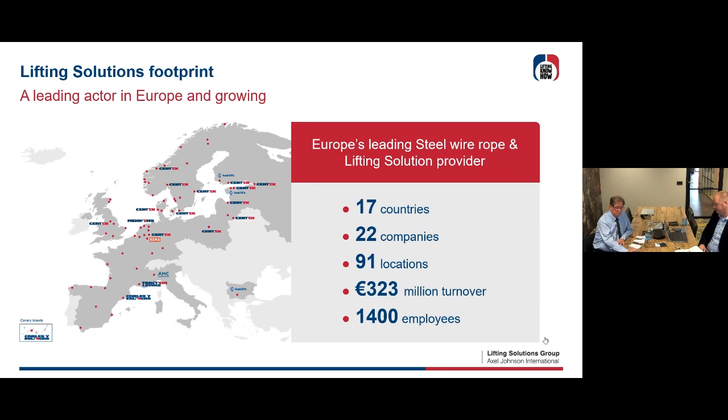Good morning, very warm welcome from my side. I'm Alain Bouwman. I'm from Belgium. I am an industrial engineer chemistry, and now I'm doing the last 36 years of steel wire ropes. So that is another story, we can talk about it later. I'm at Certex Belgium since 1986. They tell me I'm the senior wire rope specialist.

I give advice to people. We do a lot of investigations. We try to serve our customers with the best possible solutions for their wires, to have the best service life for their applications. We have our own special lab to do investigations from wires that are discarded or dismounted, and then to advise people.

Okay, welcome to the world of steel wire ropes. I have some remarks up front. Steel wire rope is a consumable. That means it has a certain lifetime, and then it will become a rope which is fatigued, which has wear, which has some wire breaks, and then you have to put it out of service. You have to replace it. It is really a spare part, let's say.

In 80 or 90% of the problems I have been solving, it is normally not a problem of the wire rope itself, but a problem of the installation, or of drums, or grooves of sheaves, or just a bad choice of wire rope for that kind of application.

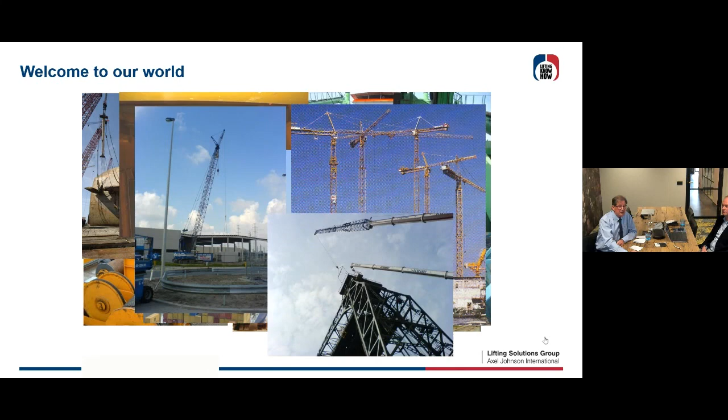To be honest, if you start with a good wire, you're going to end up with a good wire rope, if it is manufactured the good way with good machinery. But one thing for certain, if you start with a very bad wire, you're going to end up with a very bad rope also. That's why I started with these remarks.

You saw here in the picture some applications of wire rope. It can be a thin wire rope or a much bigger one, like we did for dredging companies. We have in Belgium rather good and big, world famous dredging companies, so we're doing a lot of advice there.

Applications of steel wire rope. I just added here some things you have to think about when using wire rope. Sometimes there are high temperatures involved, sometimes environmental issues with acids. You have to take care of corrosion in water applications or at sea. You need rope which can withstand high pressures. There will be rough treatments, high speeds and shocks, like on container applications and container cranes, with a lot of frequencies bending over drums and sheaves for maybe a million times.

To specify the best type of rope you need, you're going to do the calculation of how much strength you need. In certain applications, you have a safety factor to respect, depending on the application - overhead cranes or container cranes, elevators have a different safety factor.

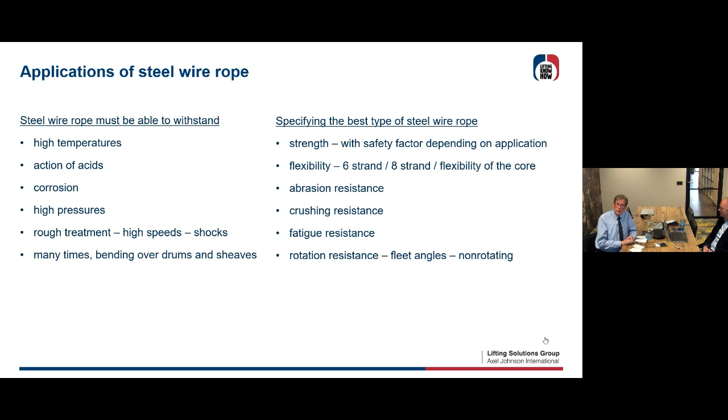Sometimes the rope has to be very flexible - you need 6-strand, 8-strand, flexible cores or not. You need to take into account abrasion resistance, crushing from ropes on multi-layer drums. You have to consider fatigue - any rope will get fatigue in the end. Some ropes have to be rotation resistant for high cranes, and you have to take care for fleet angles and non-rotating ropes.

They asked me to give you a basic webinar, a basic seminar for ropes today, so it's going to be basic. We're going to talk about tensile strengths, different constructions, rope lay left and right - I'm going to explain later - and practical applications. I'm going to give you a clue for the high performance ropes, which will come later in another different seminar.

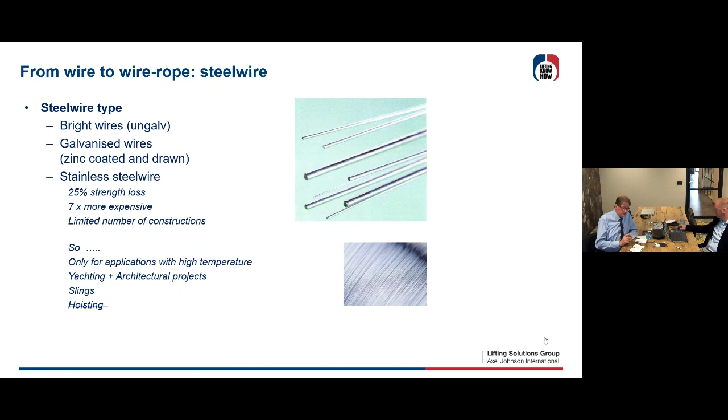For tensile strengths, I can tell you that from the factory you can have different kinds of tensile strengths, explained in Newton per square millimeter. There are nowadays 4 types of grades of different strengths in wires: 1560, 1770, 1960, and 2160 Newton per square millimeter. That means if you have a steel wire, you can produce it in all these different tensile strengths, so you end up in the same diameter with a rope which is stronger or much stronger. If you manufacture it in wires of 2160, you're going to have in the same diameter the most strong rope.

But price will go up, strength will go up, but take care, your hardness will go up too. And sometimes it is a disadvantage to have a very strong rope, but also a very hard rope, because it's going to wear out your sheaves or your drum.

So you're only going to need really 2160 if you really need the strength to have a rope which is so strong. All these wires have to conform to the regulations you're going to see in the ISO normation or European normation.

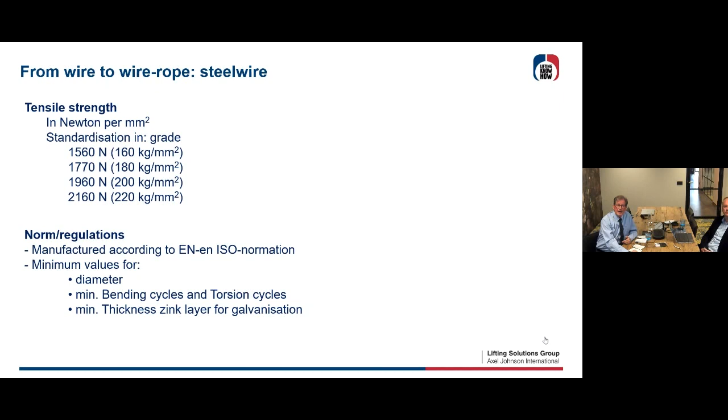So we don't care about that. It comes out of the factory, and then the factory will make a steel wire rope. Let's explain a little bit about how this whole process from wire comes to steel wire rope.

You see, everything starts at the steel mill. They produce in the rod mill, let's say, rods of round wire.

It's like the blacksmith, who's heating up, let's say, steel to get it stronger and to give it better properties. After the heat treatment, we go cleaning, and then we go to the initial drawing.

So then we're gonna put the wire to thinner and thinner and thinner diameters. And then if you need a galvanized wire, then you do the galvanization.

So you put a little layer of zinc on the wire, and then afterwards you're gonna do the final drawing. So with the zinc on it, you draw the wire to thinner wire and thinner wire till the diameter you really need.

In the 70s, till the 1970s, there was a difference between the quality and the strength and the properties of galvanized wire and bright wire.

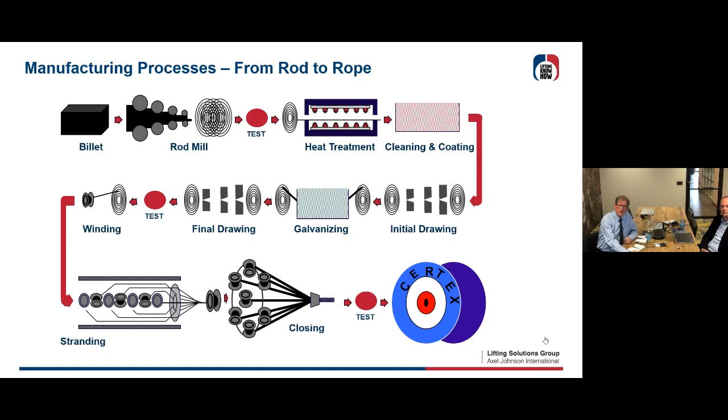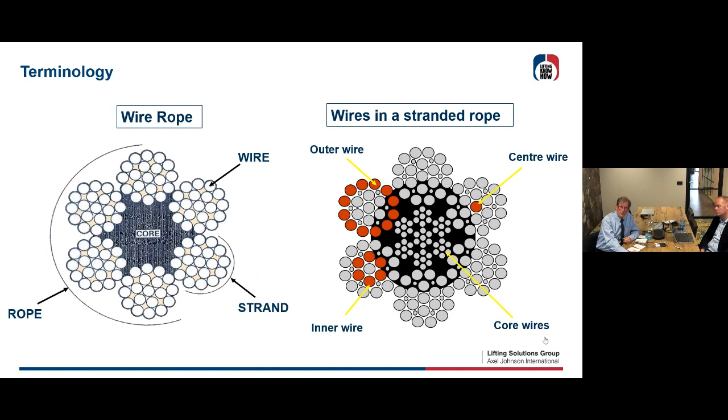So that is, let's say, the terminology about wires.

Okay, let's make wire rope. Wire rope is made in 2 steps. The first step is manufacturing of strands. So we do stranding from some wires to make a strand. And the second step is the closing of some strands to obtain a cable. We call this closing or cabling.

You see on the left there, the whole drawing. You see the center wire in the strand, and then you have the outer wires in the strand, and then

you see we have there some strands around the core, the closing. So in the end, we have the whole wire rope.

Look at the different types of cores you can have. You can have a fiber core, let's say that's cordage inside your 6 strands, or you can have an independent core, so an independent little wire rope in the middle.

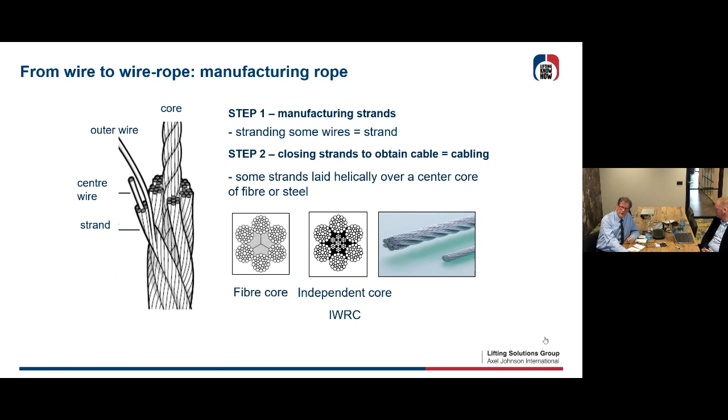Step 1 is manufacturing of the strands. Traditional, this is at the left side, the most simple strand you can make. You just take 1 wire and surround it with 6 wires. You can even try to make this kind of construction yourself with some coins. You can see you can surround it with only 6 and you have 7 wires, 1 plus 6, in 1 strand.

If in the same diameter you need a strand which is more flexible, you can start with thinner wire and add another layer, 1 plus 6 plus 12, ending up with 19 wires in 1 strand. If that isn't flexible enough, you add another layer, 1 plus 6 plus 12 plus 18, that's 37 wires in 1 strand, and you can add another layer to get 61. So more flexible every time you use smaller diameter wire and add more layers.

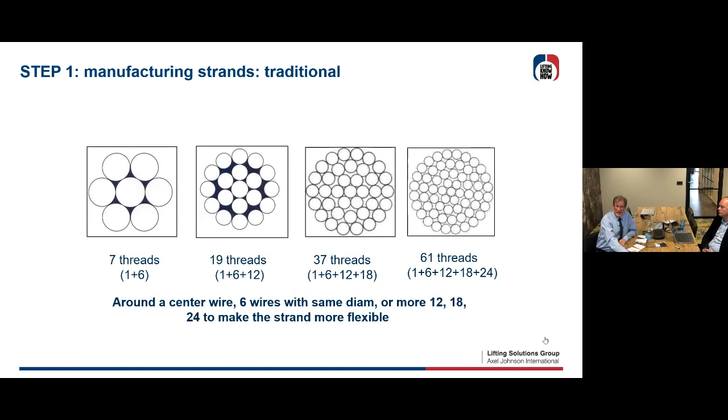A disadvantage of this traditional construction is that if you bend your strand, you're going to see internal crossings between the layers. You have point-to-point contacts, and this will give you internal wear. You're going to have cracks, and this will deteriorate your wires. So this is a big disadvantage.

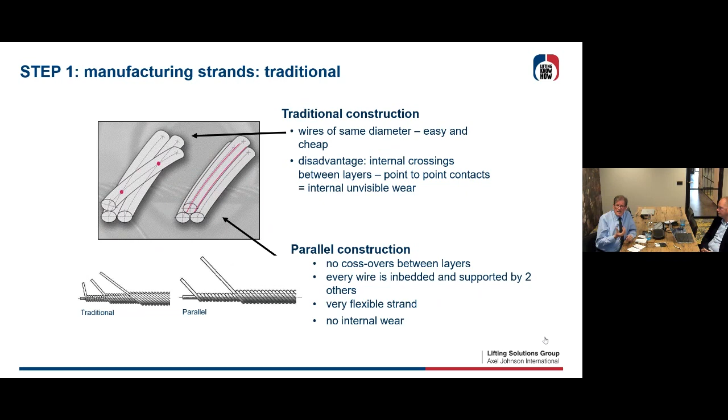And that's why they invented the parallel construction. The parallel construction is a kind of construction where every wire is embedded between two layer wires. If you bend that, you don't have point-to-point contacts, and this gives you a very flexible strand. There will be no internal wear, no crossover. Every wire is embedded and supported by two underneath.

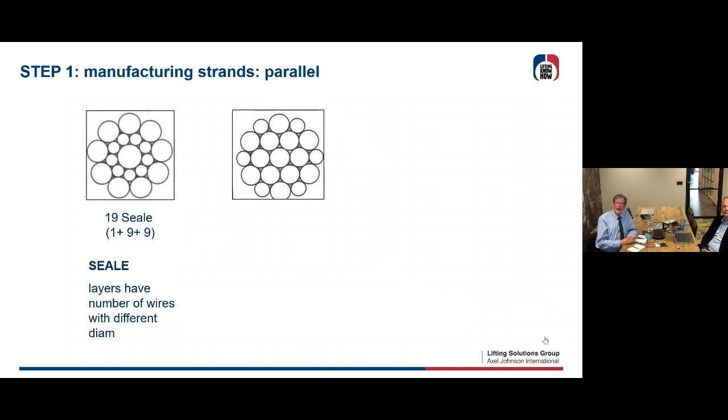And to obtain this we need another construction. I'll show you some of these parallel constructions. The first one is called Seale, invented by Mr. Seale, Tom Seale. You start with the inner wire and surround it with 9 little wires in diameter, then seal it up with 9 bigger wires at the outer layer. So this is a 1 plus 9 plus 9 Seale construction.

The advantage of this is that it's very flexible. You have the parallel construction, so no point-to-point contacts, and you have a very big wire on the outside, so you can have a very abrasion-resistant strand. There was a colleague, Mr. Warrington, who thought it's perhaps a better idea to put 1 plus 6, then alternatively thicker and thinner wire in the outer layer. That's what we call the Warrington construction.

Somebody thought, well, let's just keep the old standard construction but fill up the empty spaces between the different layers. You can see there are 6 filler threads in place there, and this is what we call the Seale Filler construction.

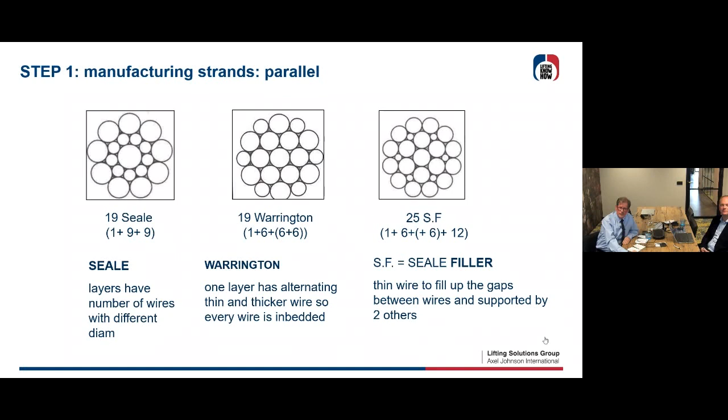And then there was another very good idea to put the Warrington and the Seale construction into one construction, and that's what we call the WS, Warrington Seale. It's a combination of the Warrington - in the second layer you have alternating thin and thicker wires - and then you seal it up with the thicker wires from the Seale construction at the outside. These are very common and used many times in steel wire ropes.

You end up with 26 Warrington Seale. If you start with 1 plus 6, then 6 thick and thinner threads in the Warrington layer, and seal it up with 12, you count it, it's 31 Warrington Seale. Then very common is the 36 Warrington Seale: 1 plus 7, alternating thick and thin in 14, and then you seal it up with 14. That's what we call the 36 Warrington Seale.

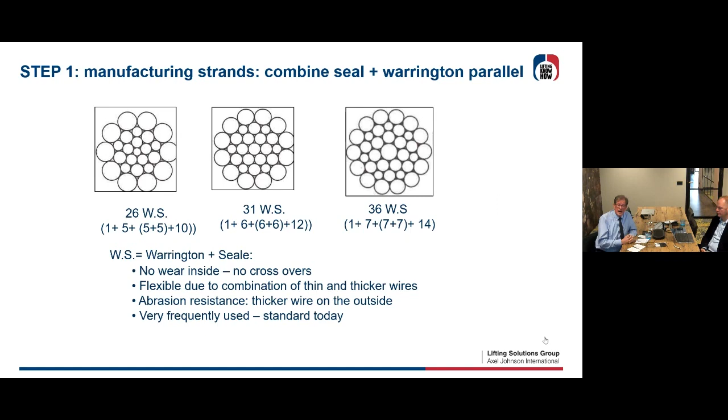So there is no wear inside, there are no crossovers, it's very flexible due to the combination of these different thicker and thinner wires inside. The abrasion resistance is very good because you have the thicker wire on the outside, and this is a very good strand. So that's what stranding looks like.

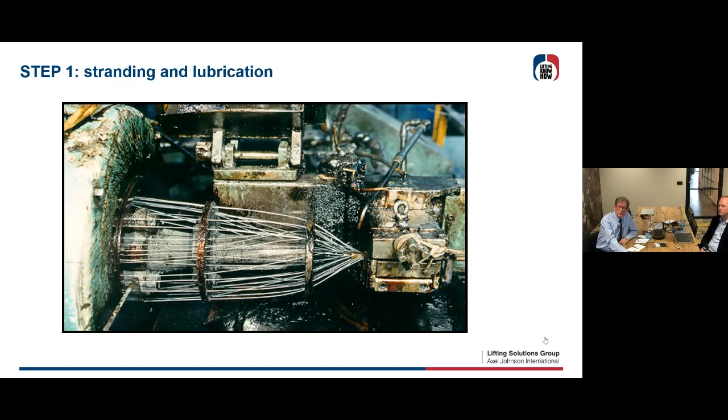Later on I'm going to show you a film where you can really see it in the manufacturing. And then step 2 is closing of wires, meaning you take several strands and then make your wire.

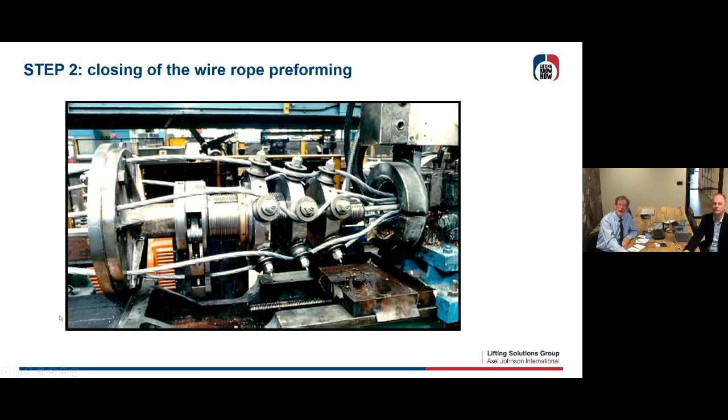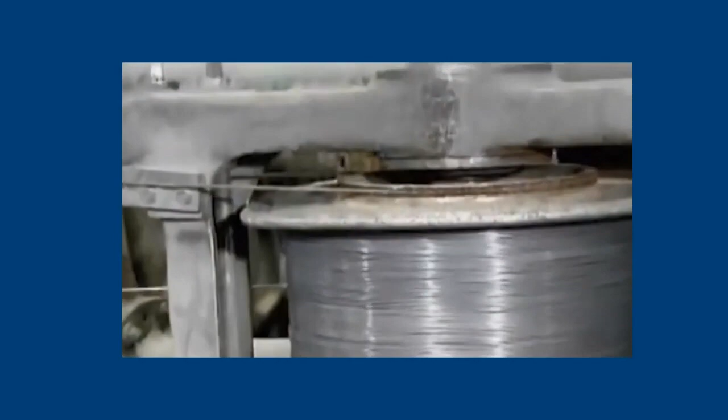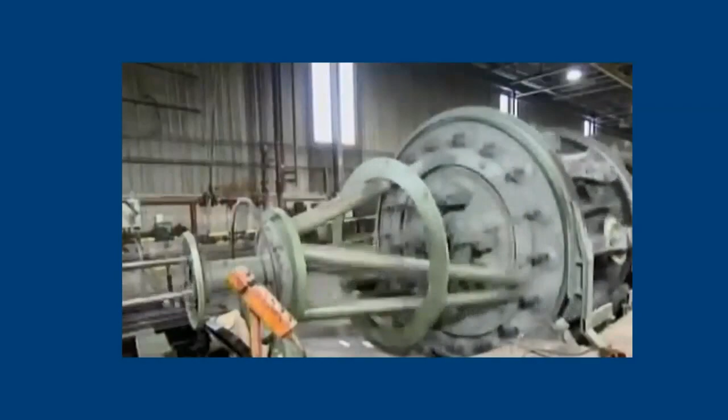Well, steel wire rope. Step 1, as I explained, we're going to take some wire and make it to a strand. Each wire is spooled on a bobbin, and these bobbins are placed in this kind of stranding machine. They can go up to 64 wire bobbins in such a machine, but normally it's very common to use 19 or 36 wire bobbins to end up with a strand.

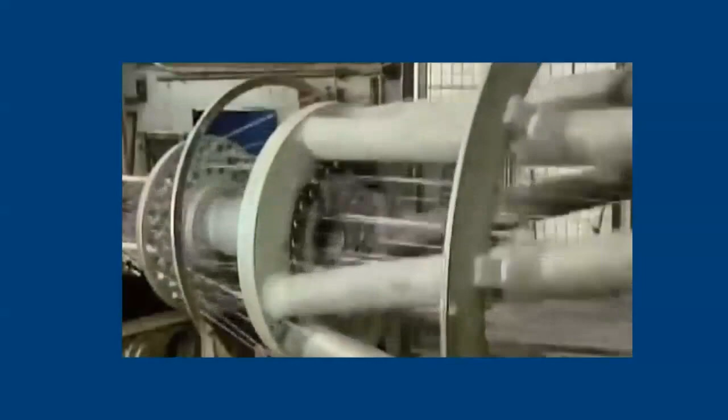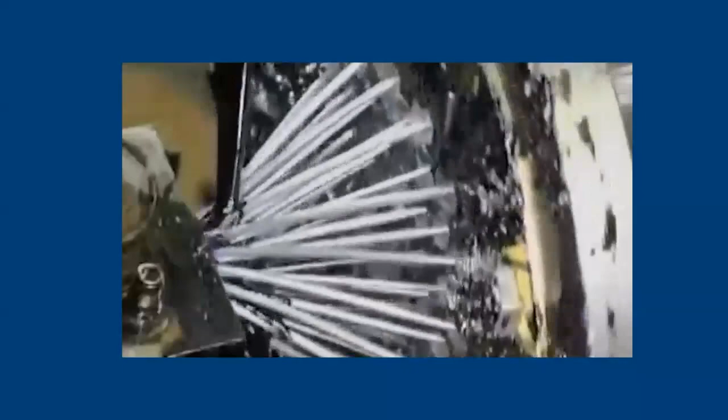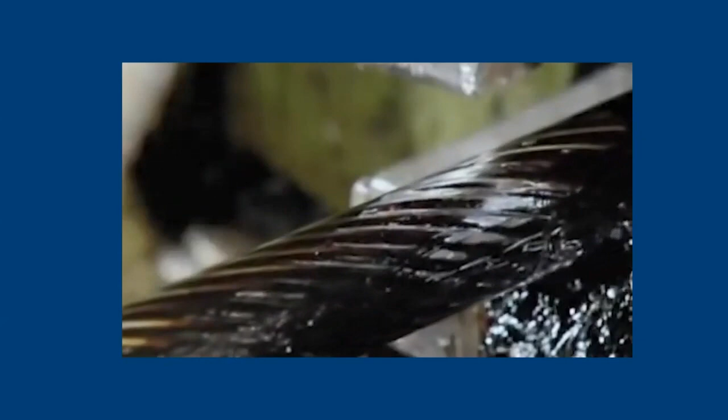How many wires per strand depends on the job the rope will perform. For different applications we require different degrees of flexibility and strength. All the wires converge in a die, which forms them to a certain diameter. Lubrication is added to this strand to move the wire smoothly through the die and penetrate within, to allow slight movement between the wires. This will increase the lifespan of your strand and of the rope.

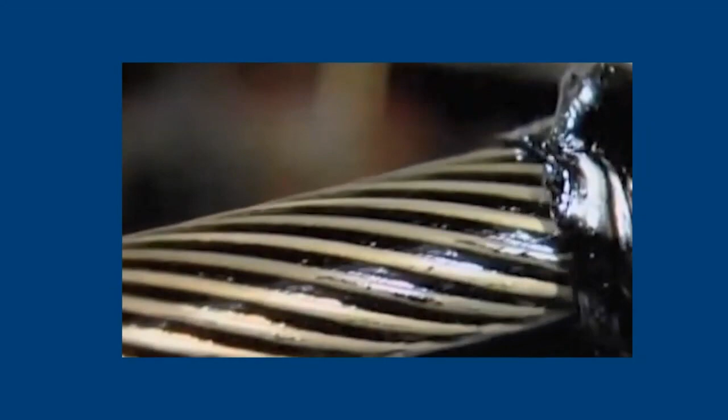The strand travels through rows of straighteners that will take away the stress. Here are these straighteners, to take away the stress, and your strand will become much more flexible.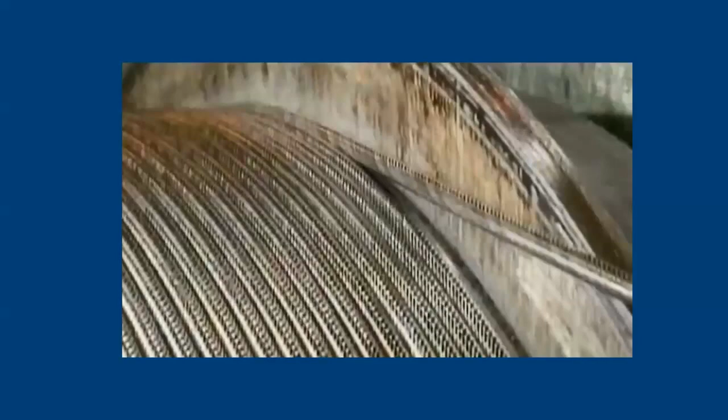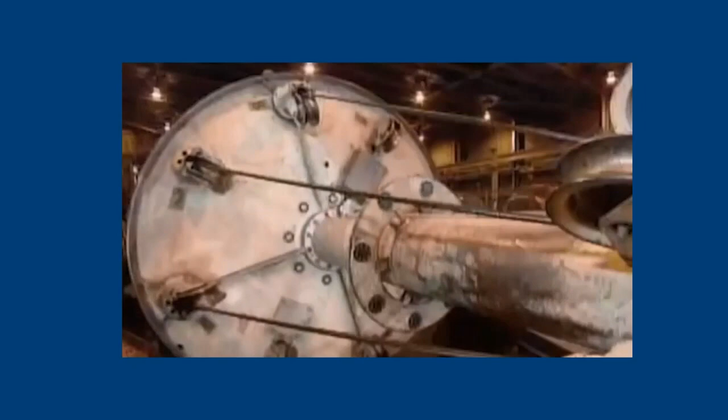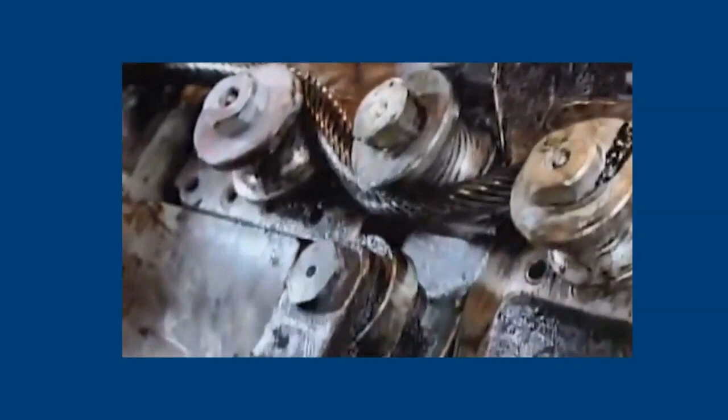Step 2 is then we take some of these strands to make wire rope. So we put it in another, bigger machine, and that's what we call a closer. Here you see 6 strands will become 6-strand wire rope. Before the strands converge in the die, rollers pre-shape them into what you see here, a corkscrew-like form. That's what we call preforming.

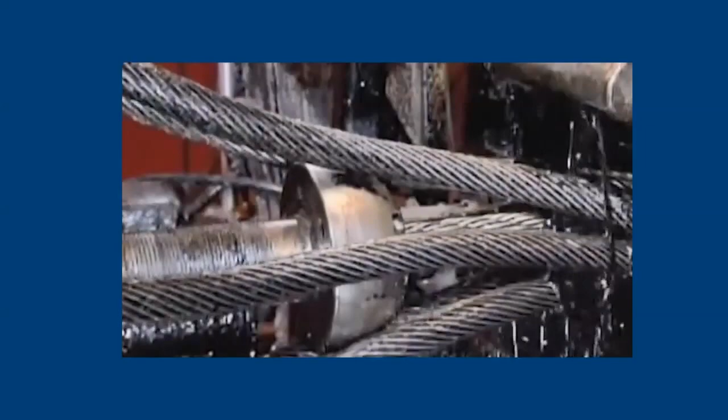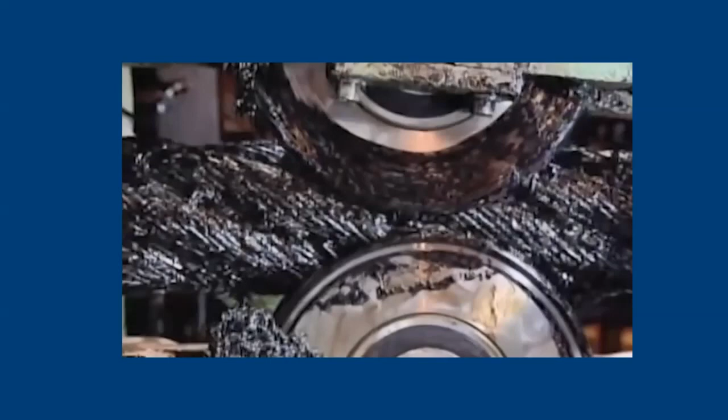The strands then enter the die, twisting together over a core. There you see the core itself. It could be also a steel wire rope or another kind of core or strand. Then the wire rope travels over some calibrating rollers, which correct the cable to the exact diameter, and make the rope flexible again, so you can cut the rope without problems of it opening.

Let's be clear about some lubrication you need. Normally we lubricate ropes between the wires in the strand, and sometimes, depending on the application, also between the strands. You need some lubrication because it will help for flexible stranding. If you don't add lubrication during your stranding, then you're going to damage the strands, the wires. So from the beginning, you need some lubrication there.

Second, you're going to have conservation for the rope while it's stocked at the manufacturer. Then it's going to be stocked at Mannens, let's say, or at Certex, and then perhaps it's going to be stocked at the client for, I don't know, months or weeks or perhaps some years. So it is a conservation lubrication. And then the lubrication will stay in your rope during your first period of use.

The grease will disappear slightly over time, and then we advise doing a maintenance lubrication, to prevent corrosion and to lubricate all the different wires and strands, by lubricating again with a lubrication which doesn't fight or put out the original. So if you do maintenance lubrication, don't forget that you also lubricate your sheaves, your grooves of sheaves, and your drums.

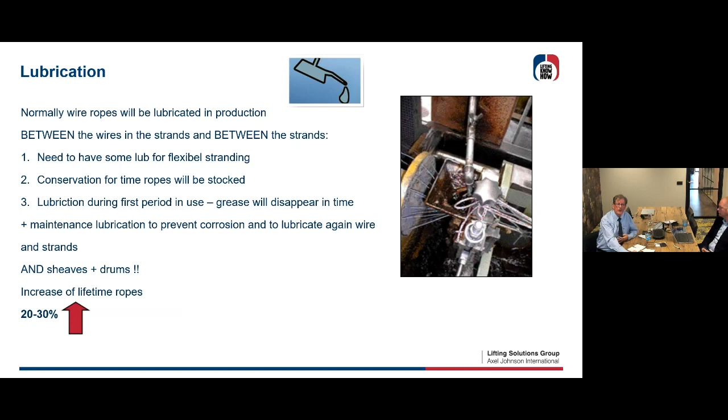In general, if you normally do maintenance lubrication, you're going to end up with 20 to 30% more lifetime on your rope. We're going to do a special seminar later on just for maintenance lubrication. Lubrication looks like this. Let's say not grease, really not greasing anymore - it's oiling your rope.

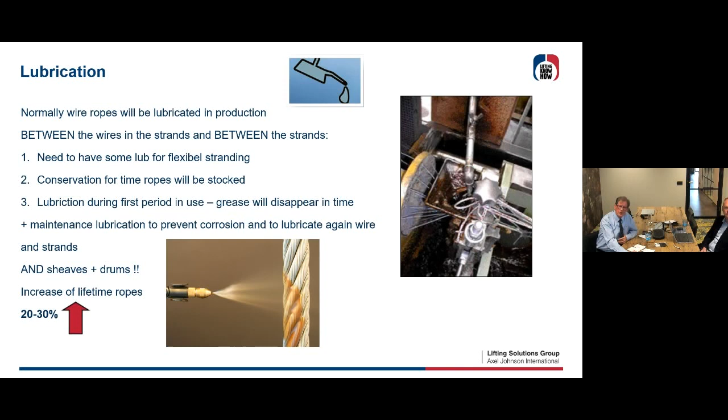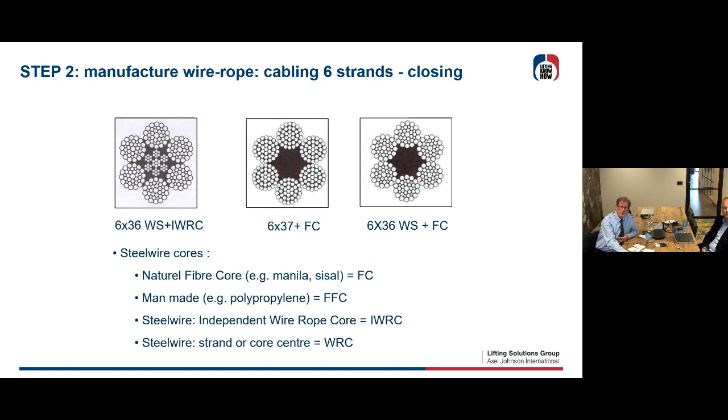It's a Coca-Cola-like spray, which goes into the strands, which go into the rope, hopefully till the core, and that's where you need your lubrication. So as you've seen, cabling or closing, we can put 6 strands around a wire rope core, so an independent rope in the middle. Or you can put also a fiber core, cordage, in it. This fiber core can be, as you see on the right side, from natural fibers or man-made, like polypropylene.

From natural fibers, it had the advantage that you could add some grease to an amount of 25% of the weight of the fiber core. It was, let's say, a kind of lubrication which was in the core, and if the wire rope traveled through sheaves, then it was squeezed, let's say, and over time it could liberate a little bit of grease, re-greasing the outer strands.

This was an advantage, but it is also a disadvantage. Once the grease is out, you're gonna have a sponge inside which will take all the water into the core, and then you'll have perhaps a corrosion problem. Also, the rope with fiber core has a longer elongation, and you can't use it in high temperatures because this is essentially a plastic core, so above 100 or 120 degrees it's going to be molten or something. So be careful with fiber core.

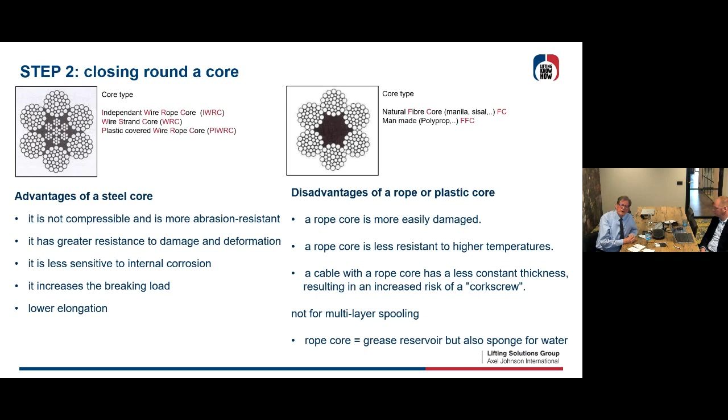It is not compressible. It can be used on multi-layer drums. It is less sensitive to internal corrosion because you have full metal. It increases the breaking load, and it has a lower elongation than the fiber core. If you use 8 strands to do the closing, then you have a much rounder steel wire rope.

As presented here, you can have 8 times 26 Warrington seal, 31 Warrington seal, 8 times 36 Warrington seal, and so on. Notice that you need a bigger and flexible inner core, and normally with 8 strands you're going to have lower pressure because you have more surface in contact with the grooves of sheaves and drums.

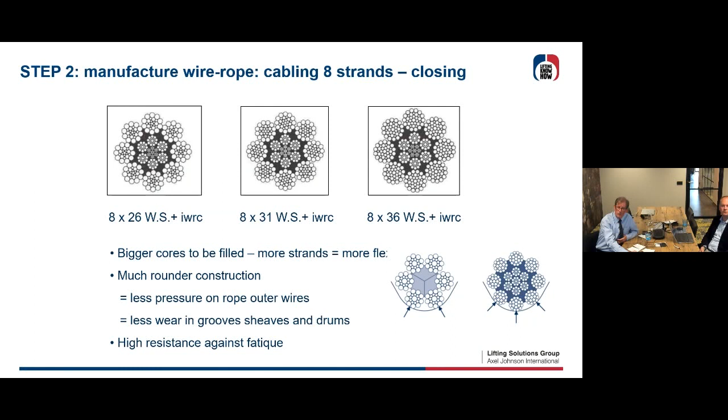So there's going to be less pressure on your rope's outer wires, which means less wear on your sheaves, drums, and wires. To show that we're not finished at 8 strands, you can have 7 strands, 9 strands, and even 10 strands outside, which makes a rounder, more flexible, stronger rope, so you can go to 10 strands.

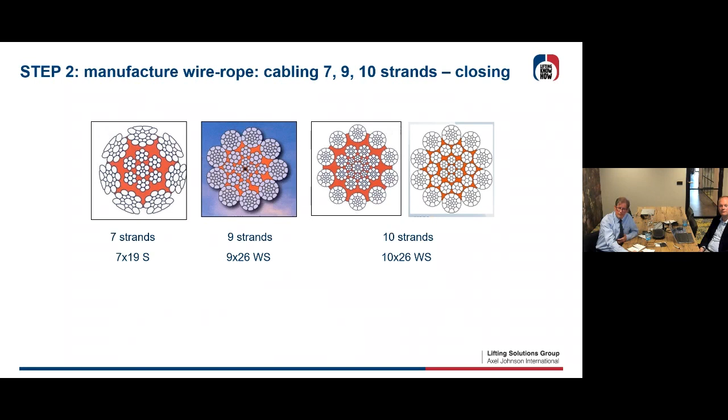If you have 11 strands or more on the outside, then we speak normally about a non-rotating rope, and be careful because normally the inner rope is the core inverted - that's what we call the non-rotating or rotation resistant rope.

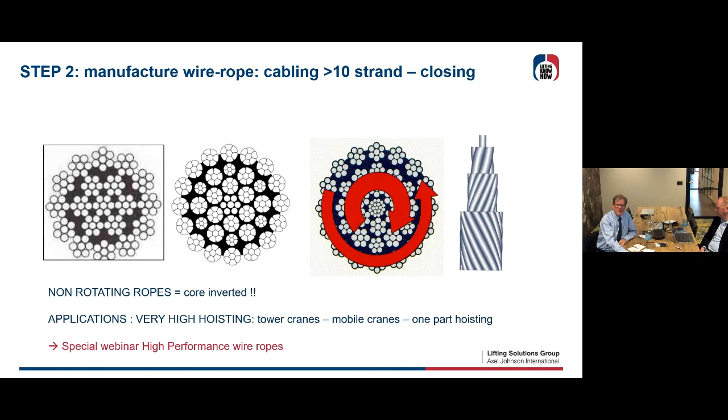We're going to talk about this kind of rope in a special high performance wire rope webinar. It has typical applications for tower cranes, high lifts, mobile cranes, and one part hoisting.

Let me show you some applications and properties of these constructions. As you can see, the more layers, the more flexible construction and the more Warrington seal you need. There are different kinds of wire diameters to construct your rope with. You see the seal construction with the thicker outer wires as an advantage; the disadvantage is it's a rather rigid rope.

You see the Warrington construction is vulnerable at the outside because you have thinner and thicker wires. Filler wire has the advantage of a more stable construction and higher breaking load. The disadvantage is that these thinner wires are very vulnerable, and the thinner wires are not counted for your discard - we're going to see that later on in other seminars.

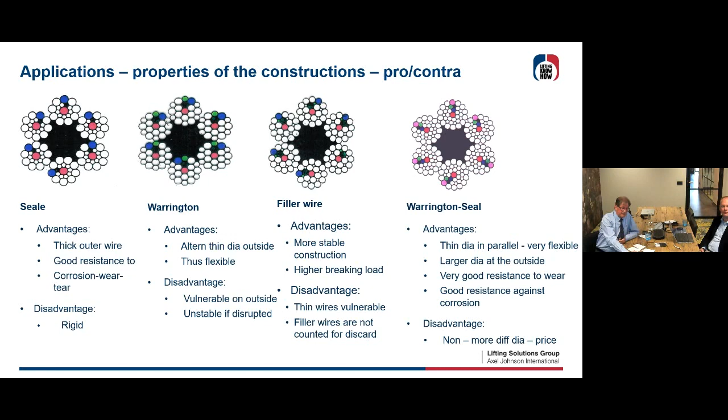Very common is the Warrington seal construction - very flexible, good resistance to wear. There are no real disadvantages; you have all the advantages of the other constructions. Of course, there is a higher price because you need different steps in stranding and closing.

Elevator rope is 8 times 19 seal with fiber core. I don't know why, but in Belgium it is still necessary to have a fiber core. All strength wires in elevator rope must be visible on the outside. And then you have overhead cranes, mobile port cranes, offshore cranes - you can look at the website of Certex.

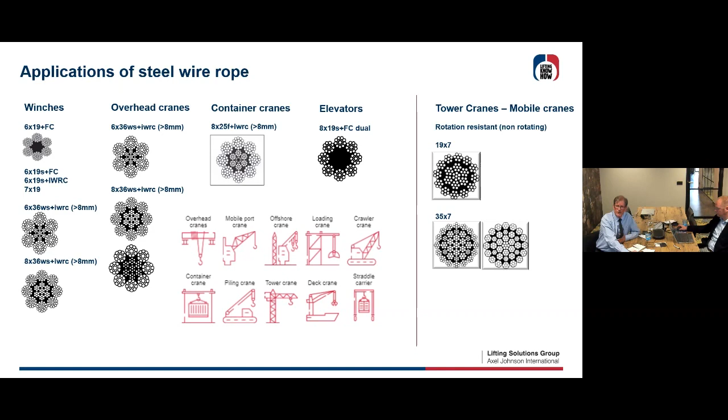And there you're going to be guided what kind of rope you normally need or we advise to put on your rope. At the right side, we have tower cranes, mobile cranes. This is the rotational resistance where the core is inverted. And there you're going to see on the outside 11 or 12 or up to 16 or sometimes 18 outer strands on your outer layer of rope, but we'll come back to that in another seminar.

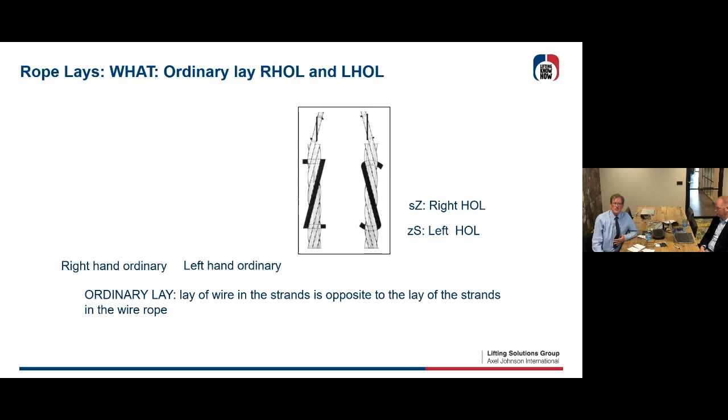Just explaining right hand and left hand ropes now. There are left hand and right hand ropes, and so you do the closing right hand or you do the closing of the rope left hand. Why? What is the purpose of this? Well, let's explain first which is right and which is left hand rope. Look...

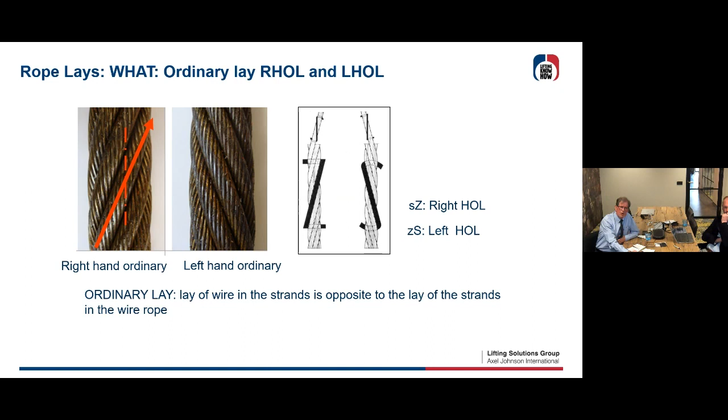At the left, you're going to see the wires, the strands are going upwards to the right side. This is right-handed rope, regular right-handed rope. You see, if you look into the strand itself, then it's the opposite. You see that the wires in the strands, they are going up leftwards. So this is what we call regular right, ordinary right and ordinary lay.

And the left-handed rope, you see the strands, they go upwards to the left side, and in the strands, the wires go to the right. And that's called left-hand ordinary lay.

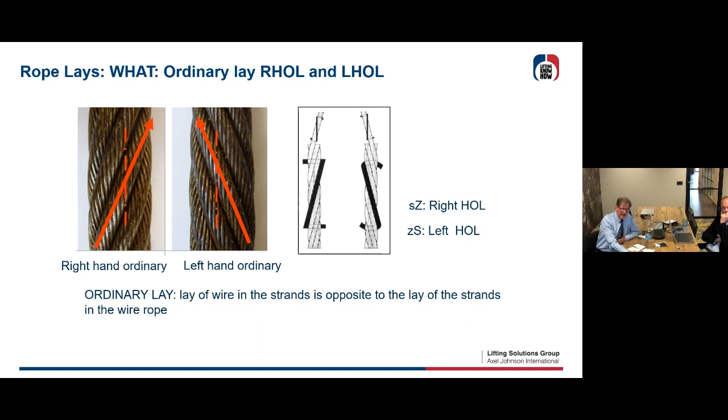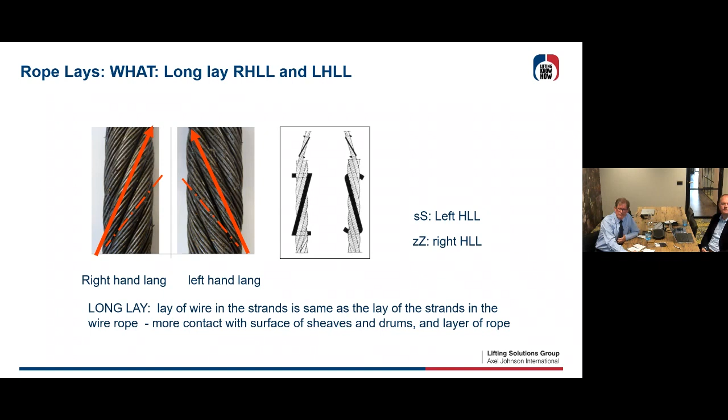Same discussion with the left. You see left, and in the strand, the wires also go up to the left. What is the advantage of this? Well, you see that you have a lot of wire touching on the outside, so normally you have the big advantage that your rope will not wear out easily. Wires will last longer. There's only one disadvantage, that you have to fix your rope thoroughly on both sides, because this wire rope would open up very easily if you turn it.

And why do we need right and left-handed ropes? Well, I explained this is a helix form in your 6 or 8 stranded rope. And if you put load on your wire rope, this will open up. That means that your load will rotate. The bigger your load, the bigger the rotation will be. So if you don't want your load to rotate, you normally need two wires. You're going to need a left one and a right one, and you're going to have to balance it.

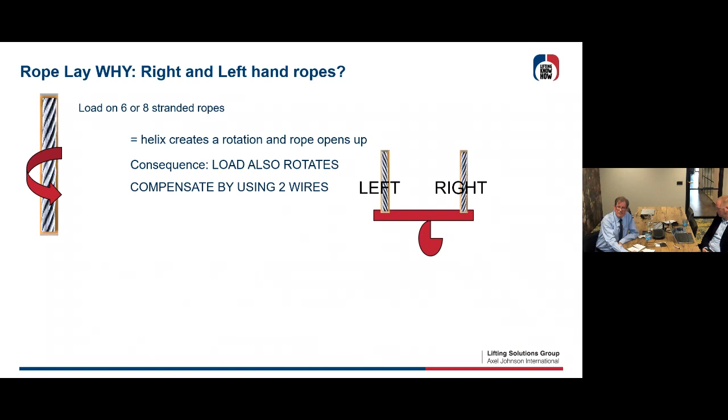So if you put your load on the hook in that situation, the left will open up on the left, the right will have a moment in the opposite direction, so nothing will turn. That's one of the reasons you need left and right hand, but you also have the drums, because the drums have a right or a left-handed pitch. And you need to have a certain left or right-handed rope on a right or left-handed pitch drum. It's depending on the deflection angle, the wire rope will open up if you don't use the right or the left-handed rope.

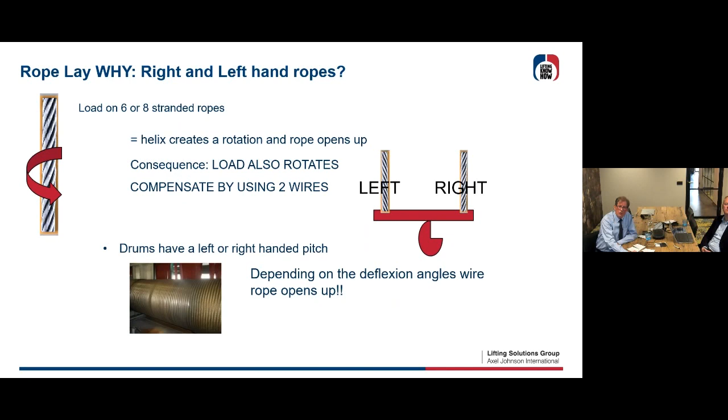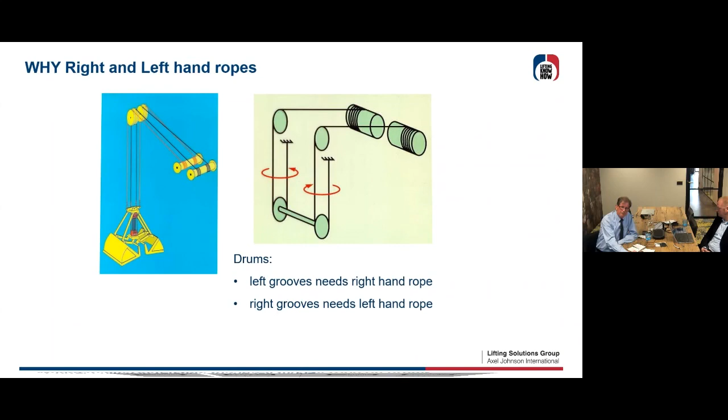So in certain applications like baskets here or on overhead cranes, you're going to see that you need a left and a right-handed rope, which give no moments on your loads. And you also see on the right side that you need left and right-handed rope because your drums are right or left-handed pitched. So this gives an idea where to put left and where to put right-handed rope, so take care.

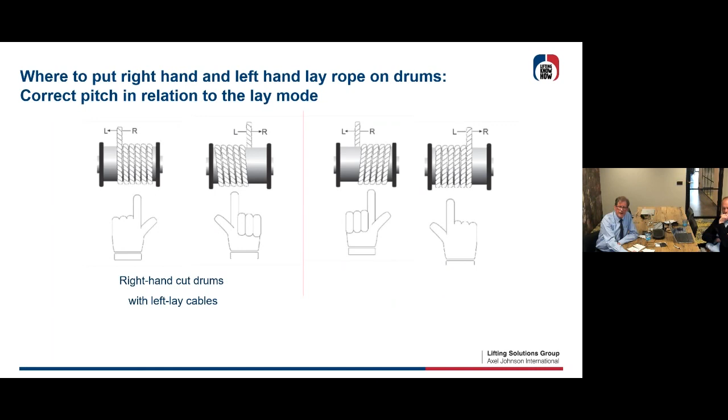You can look it up on our website if you're not certain where to put it. If you don't follow this guideline, you're always going to open up the rope, and it's better to close up rope. Once you've opened up a rope, you're never going to close it thoroughly again. Right hand and left hand, it's very important to have a good lifetime.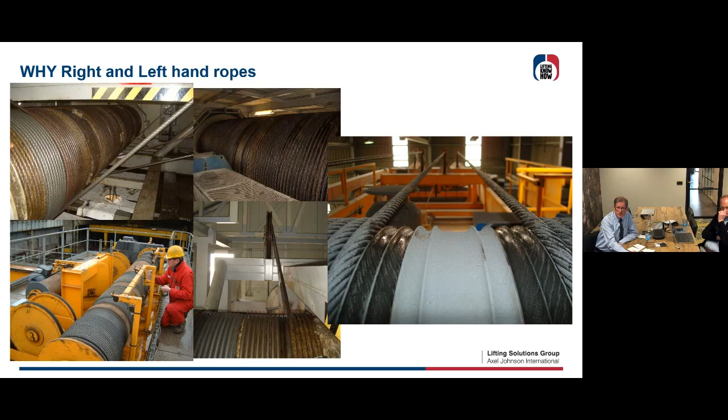Okay, here are some examples of where to use right hand and left hand ropes. You see on the right, the right-handed rope on a left-cut drum, and then you have its sister rope, the left-handed rope. You see different drums there, and sometimes you have 4 ropes in left, 4 ropes in right to have the calibration, let's say, of the wires.

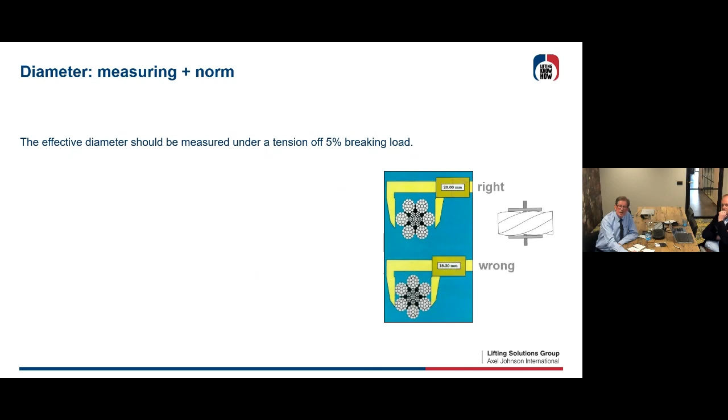Normally, you need to have a tension of 5% of the breaking load. This is not always possible, but this is how it is prescribed in the norm. From 8 millimeter up, the norm now has a tolerance of -0 till 5%. Till 2010, the norm was -1 +4. Of course, we from Certex and Manus, we couldn't deliver a rope which was -1%, so we were still always -0 to +4.

But now, due to some ISO standards from China and Japan, it is now +5. Anyhow, our standard in tolerances for ropes, which we will sell you, or which Alain Bouwman will sell you, will be at +3.5%, so it will always fit on your existing sheaves and grooves. So take care, be aware of some manufacturers who could have a bigger diameter.

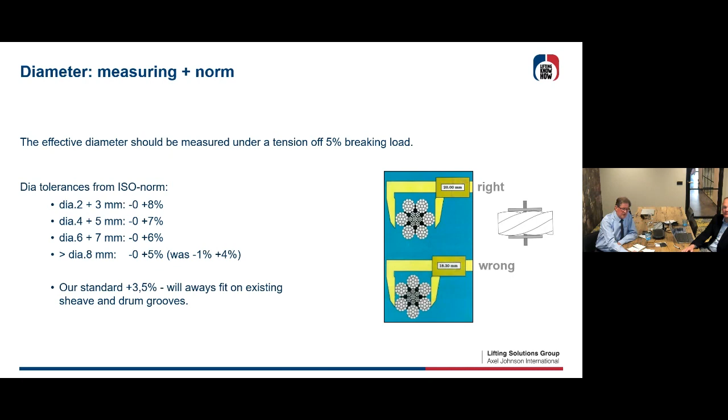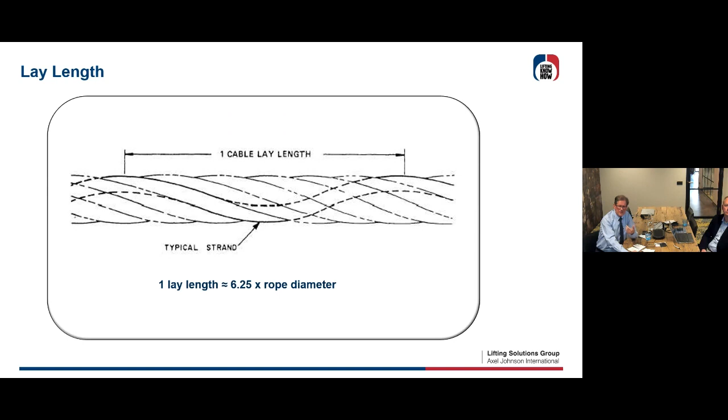Well, this was a first introduction for standard wire ropes, 6-stranded, 8-stranded, and so on. Next seminar will be about special wire ropes. What is so special about special wire rope?

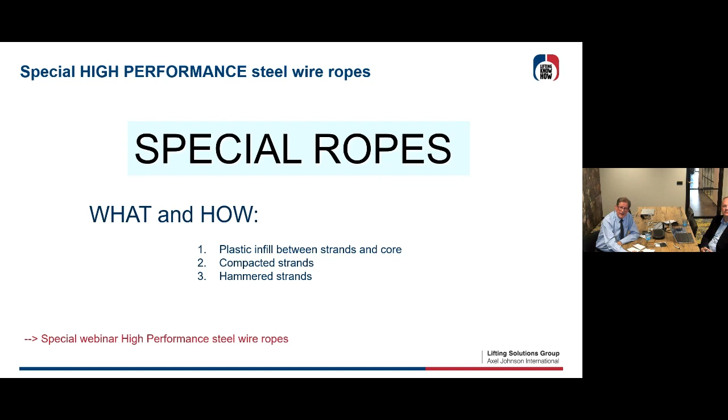I'll explain it because there was from the 1970s very important inventions in steel wire ropes with plastic infill between strands and core, compacted strands, and hammered strands. I show you just to have an idea - what you see here is that the wire rope core is plastified, and then the 8 strands are embedded in this plastic layer. All the red thing you see there is plastic, so this will give internal wear reduced between the different strands, so there are no contacts anymore, so you don't have to care what is happening inside my steel wire rope core.

It keeps the grease inside during your probably whole lifetime. So if you're going to maintain your rope with some lubrication, you only need to grease or oil the outer strands. It keeps water or dirt out of your cable, so you're not going to have a corrosion problem, and it's going to increase the stability of the rope. If you want to open up this rope, the plastic will prevent opening up, so you're going to have a very stable wire rope.

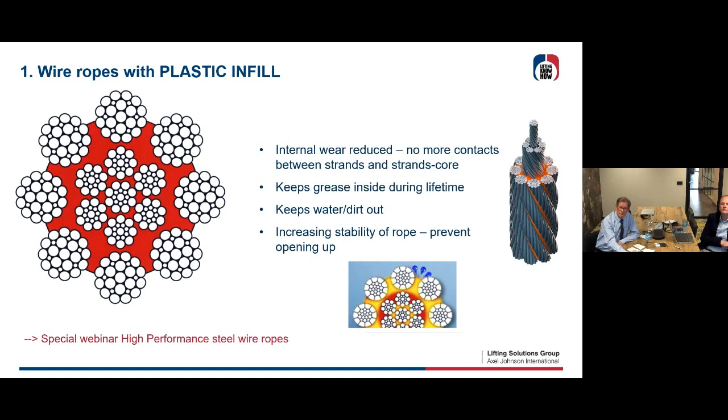The second invention they had is to do compacted strands. So first you make your strand, and then you get a higher breaking load, more steel in a given diameter, because you're going to roll your strand to a compacted strand. It gives or stays with a higher flexibility, and gets lower stresses - there's no more air inside.

Big advantage of this is the broken wires - if you have a wire on the outside which is fatigued, it will stay in your compacted strand. So when it travels to sheaves, it won't damage its neighbors. So you're going to have one broken wire and that's it. If you still have round wires at the outside, this round wire will flop out of the strand, and when it goes through your sheaves, it's going to disturb its neighboring wires, and you're going to end up with one wire, and after some days with several wires and so on.

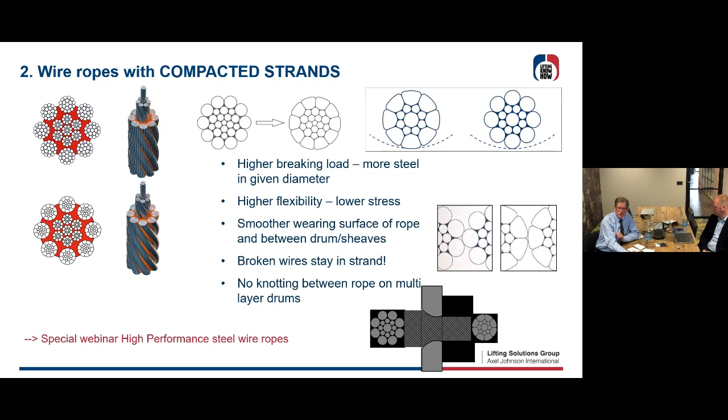If you have multi-layer ropes on several layers on your drums, you're not going to have this knotting problem between ropes, so it's going to be much smoother. So it is done like this, so you have your round wires becoming in your strand to a very smooth surface. The whole of your wire rope will become rounder, and there will be more contact with your sheaves and with your drums.

And then the third thing is rotary swaged ropes. You're going to hammer these ropes to become more round again. So especially for multi-layer windings, the cable becomes more even and robust, and you're going to have more steel in your cross section.

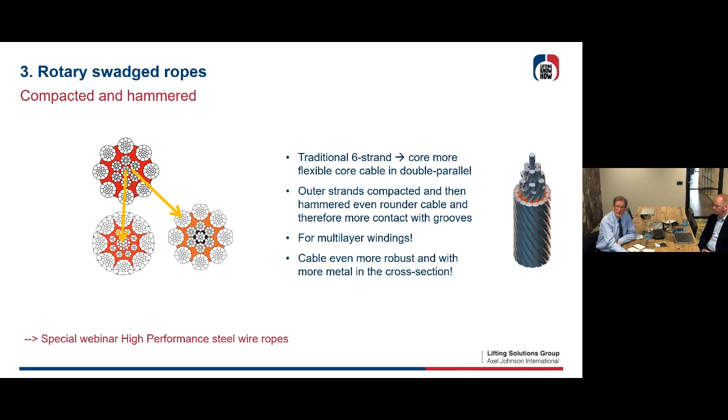But this is a special webinar for high performance steel wire ropes coming up. I don't know, we're going to ask Michelle - somewhere in June, yeah. But you are invited to come and listen to those upcoming webinars.

There will be other webinars - inspection of wire ropes, discard, magnetic rope testing, interesting for everybody I think. Very important for your lifetime, the rigging arrangements. We're going to talk about sheaves, drums, blocks, lubrication of wire ropes from the beginning, or maintenance, and there'll be a whole seminar on different end terminations also.